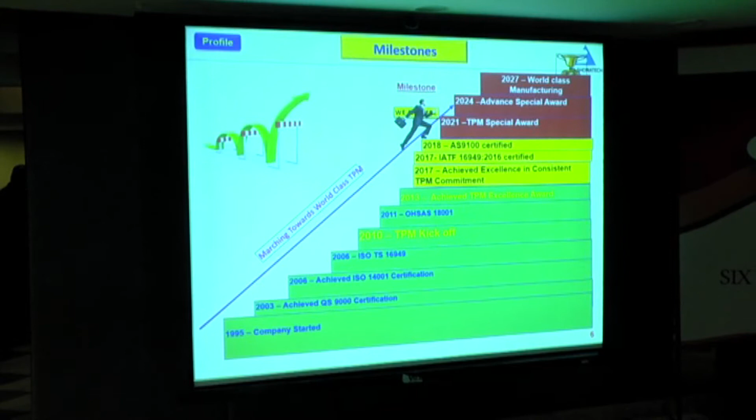Recently we started an aerospace parts division, with our customer Honeywell. This is our milestone: we are certified for TPM excellence with consistent TPM commitment, IATF certified, and recently we are certified to AS 9100.

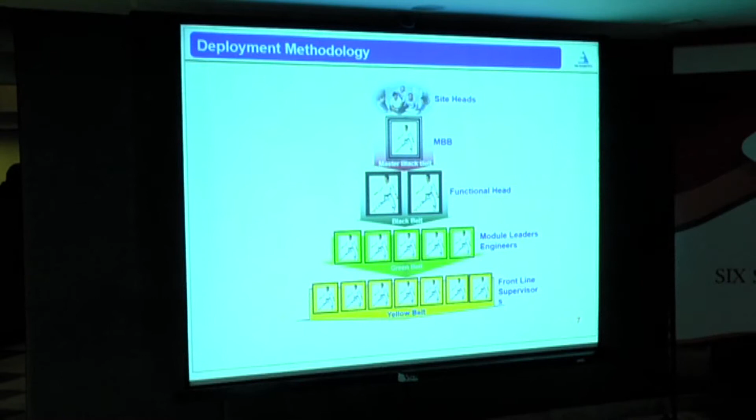This is our deployment methodology. We start from frontline supervisors who are Yellow Belt certified, module leaders and engineers are Green Belt, function heads are Black Belt and Master Black Belt, and then site head.

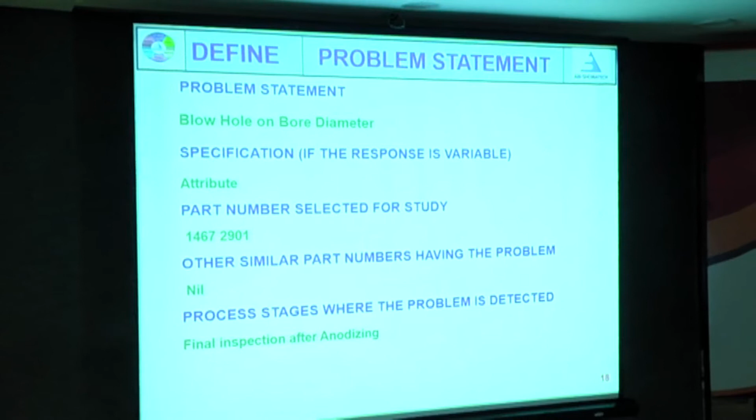The defect type is attribute. For the study, the part number selected is 1467 2901. Other similar parts don't have the problem. Our problem is detected as final inspection after anodizing.

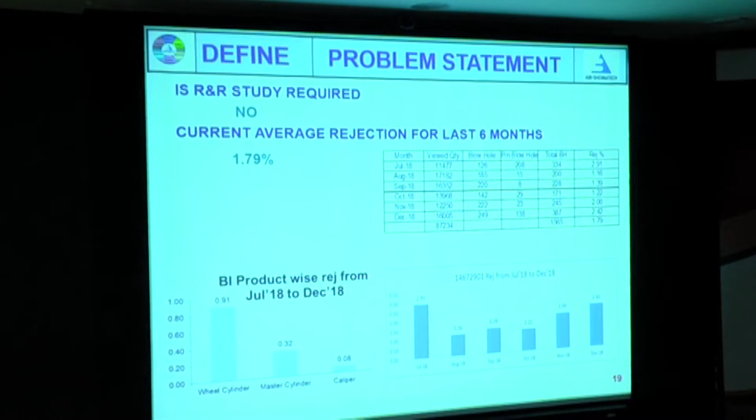Next, we separated the product-wise rejection percentage: wheel cylinder, master cylinder, caliper. Wheel cylinder has more percentage of rejection, at 0.91%. So the part number selected is 2901. The last 6 months' average rejection is 1.79%.

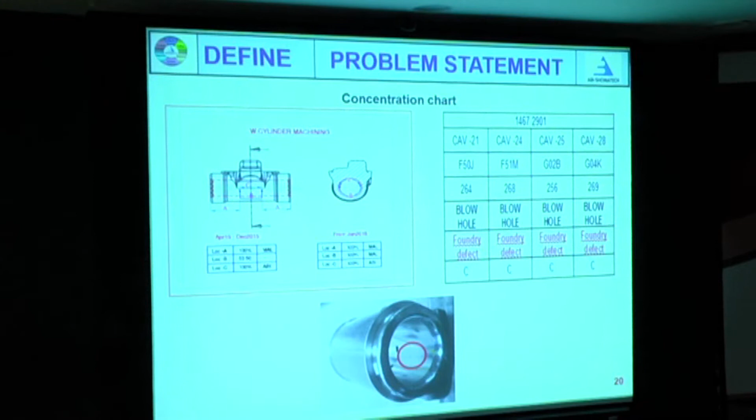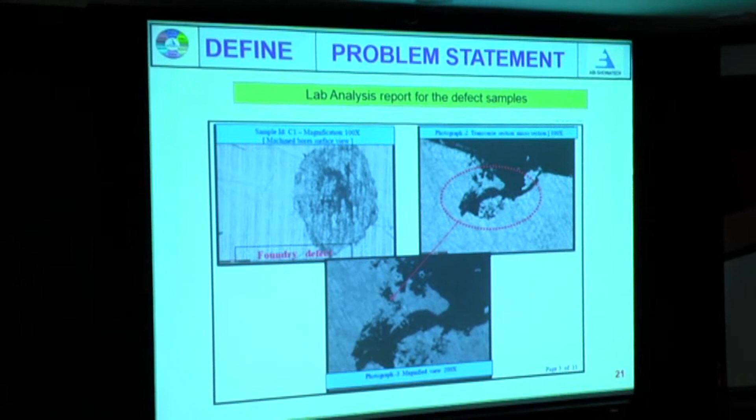Next, we collected the blow hole samples and separated the defects by location. More problems occurred in the C location on the bore diameter. The defect sample was given to laboratory analysis, and we confirmed it as a foundry defect, that is blow hole.

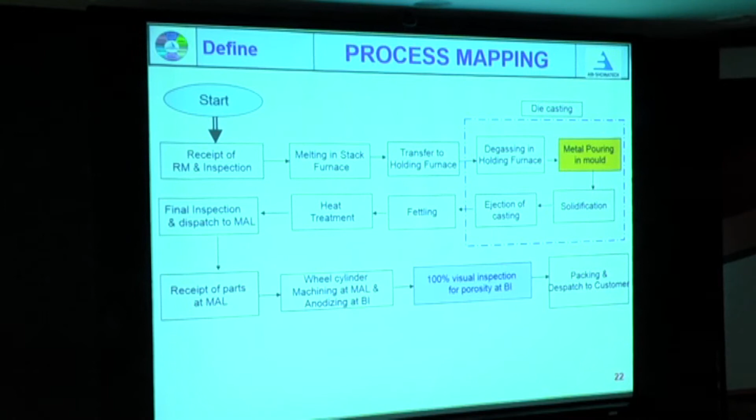This is our process mapping. The problem occurred during metal pouring in the mold, and the detection stage is 100% visual inspection for porosity at BI. Next, this is our SIPOC approach.

Process: gravity die casting process. Requirement means defect-free casting for the customer.

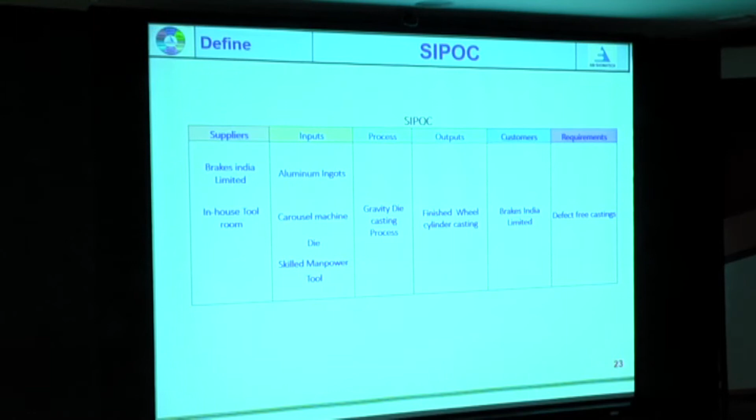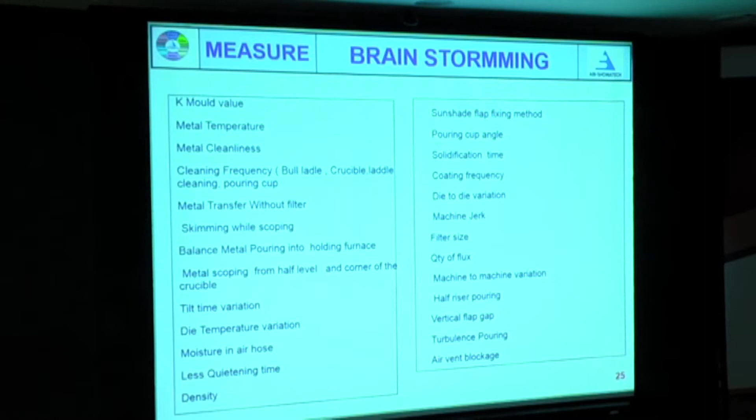Next we come to the Measure phase. We conducted a brainstorming session for the blow hole defect, identifying the brainstorming points. We separated the brainstorming points into man, machine, method, material, and plotted them separately.

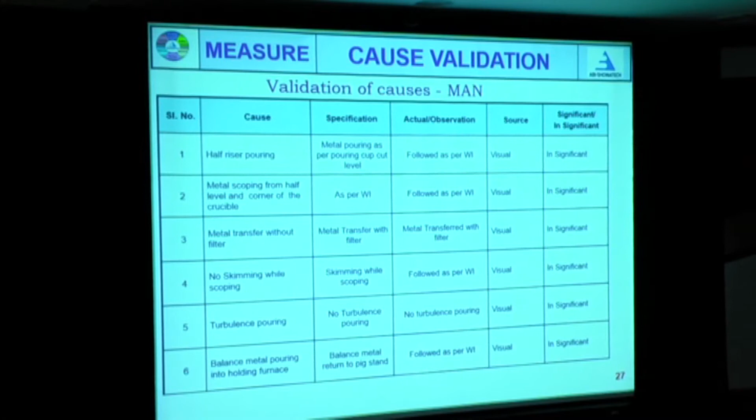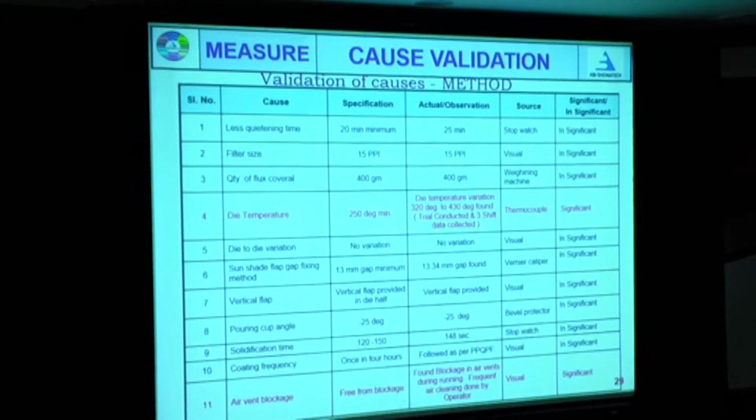Next, each cause is to be validated. For man causes validated, there are no significant characteristics identified. Next, machine causes: each cause validated, and no significant characteristics occurred. Next, method causes: each cause validated, and two causes are significant.

One of the causes is die temperature. Die temperature variation is too high, so a trial is to be conducted for three shifts and data collection to be done. Next, air vent blockage frequently occurred and the operator was frequently cleaning during running production.

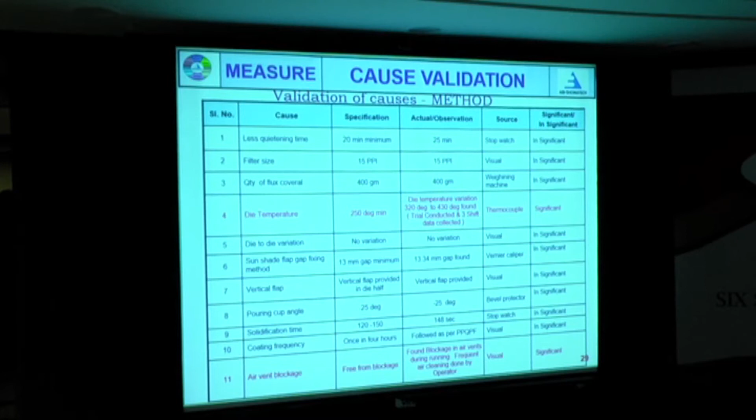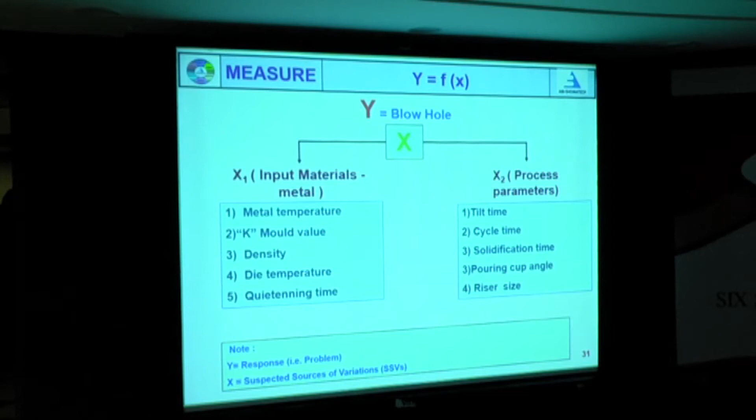Next, these are our SSVs, specifications and methods of checking. Next, I hand over to Mr. Sukumar.

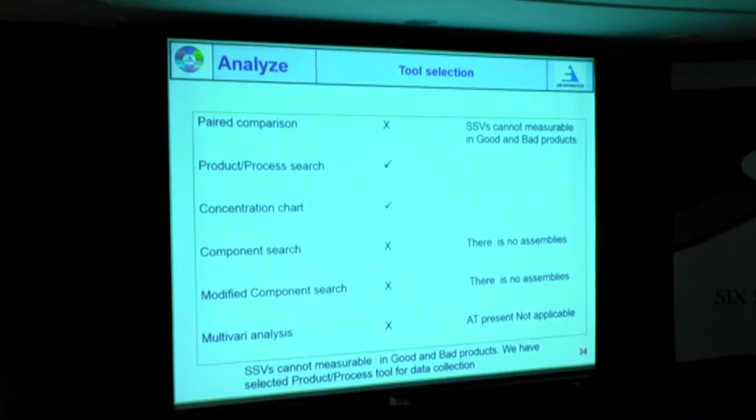Next we see the analysis phase. In Six Sigma Shainin and TQV, first we suspect input parameters, and these are the tools we selected for data collection. We selected product process search and then concentration chart. The concentration chart we already plotted; there is only a single location, location C. This clearly defines it's a process deficiency, and since SSVs cannot be measured in good and bad products, we selected the product process search tool.

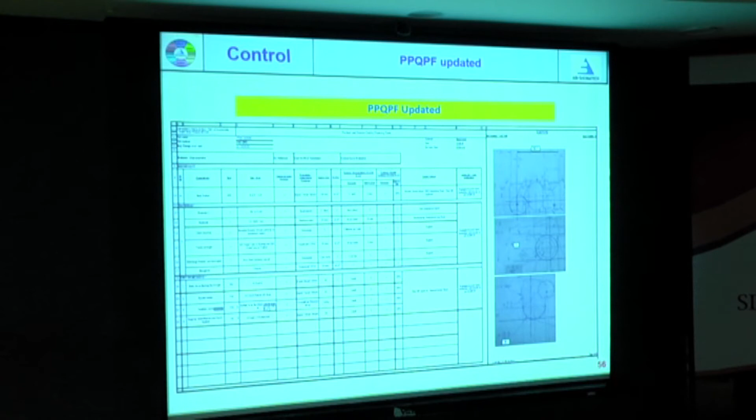In the control phase, we have updated the optimized parameters in the PPQPF, the die drawing model is also updated, and the first-off report is also updated. This is the die drawing model updation sheet. In the PPQPF update, we have introduced the die temperature of 320 to 410 degrees and water cooling is also added.

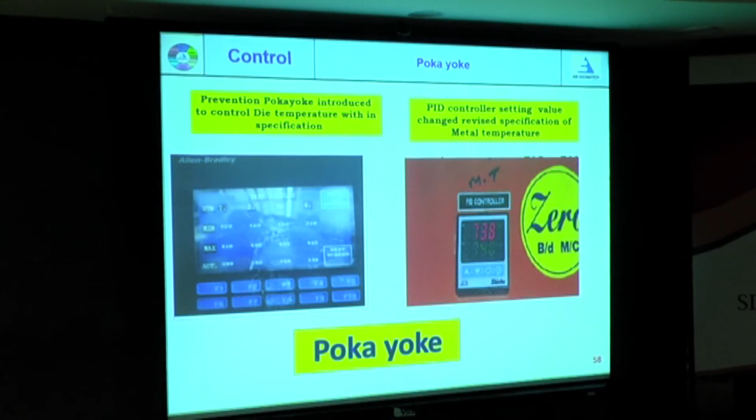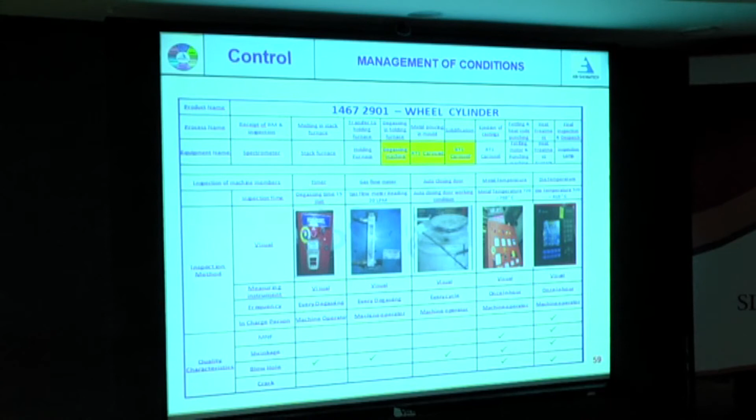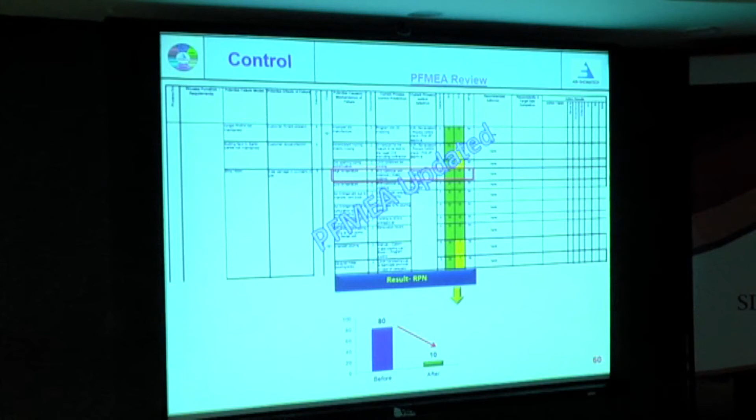This is the PFMEA review. We have updated the high die temperature with interlock and water cooling provided. And the SOP is also updated. The blowhole rejection trend before the start of the project was 2, and after completion of the project it will come to around less than 0.5%. And the overall cost saving will be nearly 5.5 lakhs per annum.

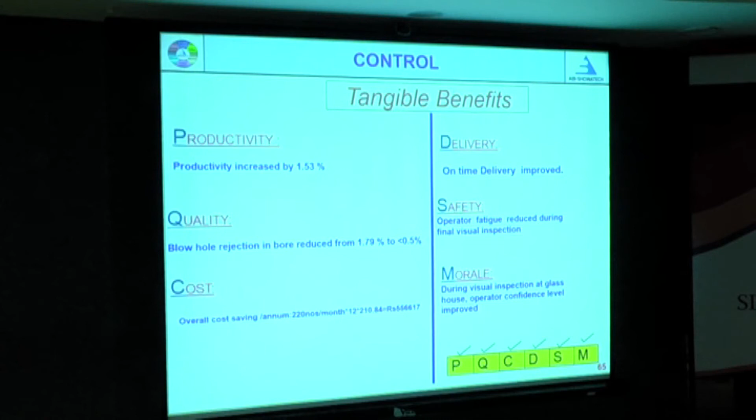These are the tangible benefits. Productivity increased 1.53%. Blowhole rejection reduced from 1.79 to 0.5%. The cost saving will be 5.5 lakhs per annum. And on-time delivery improved. Safety: operator fatigue reduced during inspection. And morale: operator confidence level improved. These are the tools used in different phases. Thank you.

Nice presentation, my dear friends. Earlier your die temperature specification was 250 degrees? 250 degrees minimum, sir, minimum. What is the maximum? Maximum around 480 it comes during the process. No, what is your defined maximum? As per the control plan, only 250 degrees minimum is given by production engineering. Now we have changed to a controlled specification, that is 320 to 410.

Great. So in the study, your specification was 250, whereas during the analysis you found out it is ranging from 320 to 420. So now, 320 to 410 gives a good result. That is the best result. All the castings are coming in that variation.

Okay, by introducing water cooling, how much heat is getting transferred, or how much control are you having? How much heat is getting dissipated through water cooling? Yes, sir. With water cooling introduced, the die temperature is within the specification band of 320 to 410; we achieved this after water cooling introduction in the die. No, now that you have specified 320 to 410, how much heat dissipation is happening in the water? Okay.

Did you measure water temperature? Okay, that we will measure, sir. No, I understand. My question is the die itself. First, if the die was designed, you are saying it is not there in other parts, only in this part. But what is the temperature from component 1 to component n? Does it increase? Does it remain stable within this range?